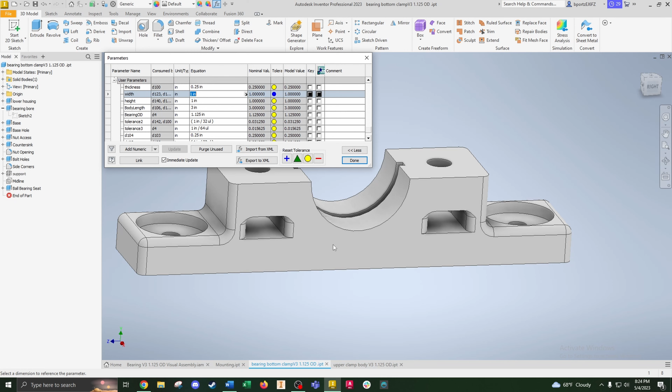I chose to model my bearing in Inventor because that's what I have available to me, and that's the modeling program I've spent the most time in. So the first part is setting up the parameters. I wanted to make the resizing part very simple, where all I need to do is resize this list of parameters in each part and simply export the file to my printing software. After planning, I landed on these 5 main parameters for the project: length, width, height, bearing OD, and tapped hole OD.

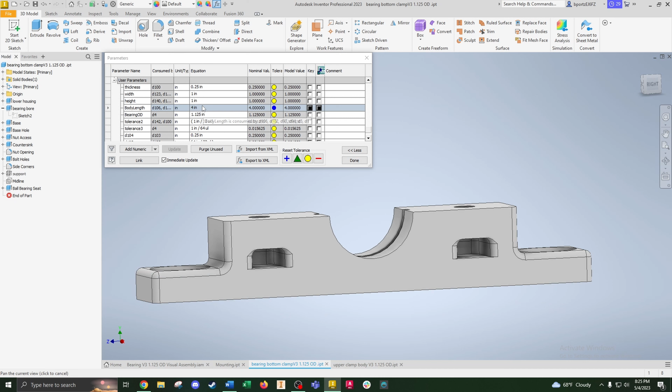At first, as I dimensioned the parts, I used any parameter that would fit the distance I wanted for that particular dimension. But when I went to test rescaling the part, all the features would move around relative to each other, and I soon realized that I would need to use a parameter that shared the same axis as the direction of the dimension I was using.

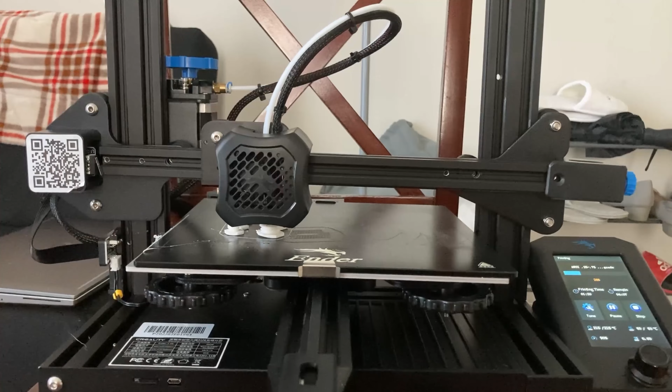During my first design, I originally used 3D printed bolts. I experimented with different printed diameters and thread sizes, but found that even if I printed thick bolts, the plastic bolts would elongate and slip off the thread. I tried coarse, fine, and metric threads, but looking at the upcoming project, I knew this wasn't going to cut it for me. I think that it could have been fixed if I changed to a beefier thread standard like Acme, for example. That thread type would give the design more room for the threads to strain without fully slipping past the thread.

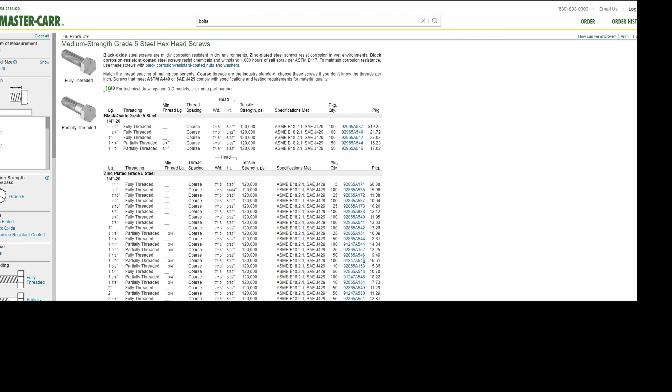But this was already taking too long, so I decided to switch to adding metal fasteners instead. These are very common and can be picked up in large quantities. If I scaled the size of the bearing to a heavier size, I may need to resize this in the future, but for now, I'm happy with how it turned out.

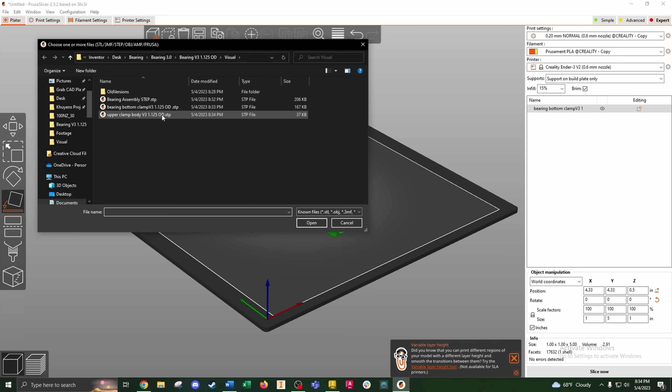Now for the printing part. When printing these bearings, I wanted to reduce the amount of support needed, so I went ahead and added some custom supports in the pinholes. These help the pinhole to print accurately. With the custom support, I can just reach into the hole and cut the custom support out with pliers. It's also better to print the part in 2 pieces so that the bearing face is on the top of the print to ensure it prints accurately with a smooth surface.

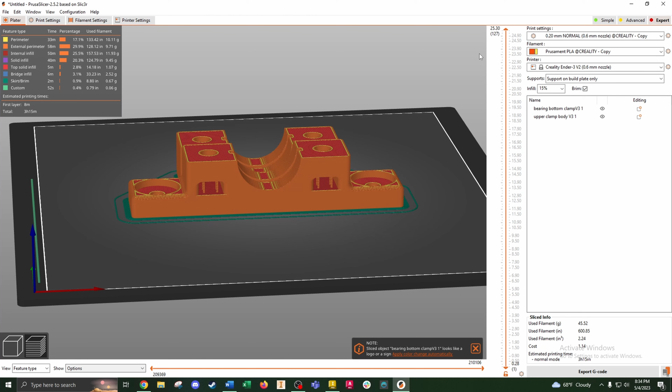Here is a clip of how I organized the bearing in the printing slicer. As I scroll between the part layers, you can see the gyroid infill layer going down. I never get tired of seeing that. Enjoy a short time lapse as the bottom and top parts are printing in the 3D printer.

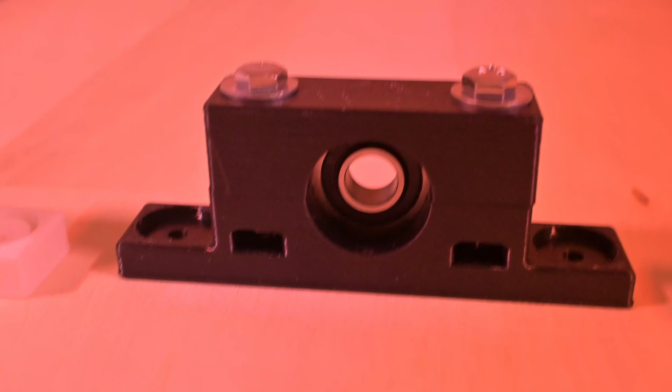For the assembly stage, I made it so that you could size the bearing to allow for a ball bearing to sit inside the bearing OD, or you could just allow the drive shaft to rest on the bearing face and slide across the low friction surface. For projects requiring high RPMs, I'm gonna need to always use a ball bearing to avoid having to replace the pillow block, but for low RPM projects similar to the one that I'm working on, just allowing the shaft to rest on the bearing face should work just fine.

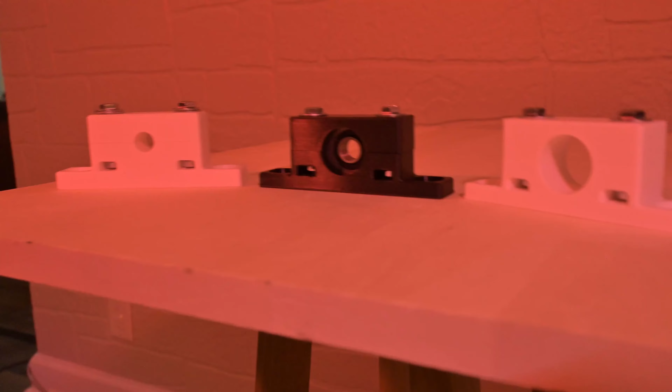For me, these bearings turned out great. I'm happy with how fast they print and how quick I can design them. I'm also happy with the cost that it takes to make them. Now, if I have any projects in the future that I need a bearing, instead of ordering it online, all I have to do is just print it up.